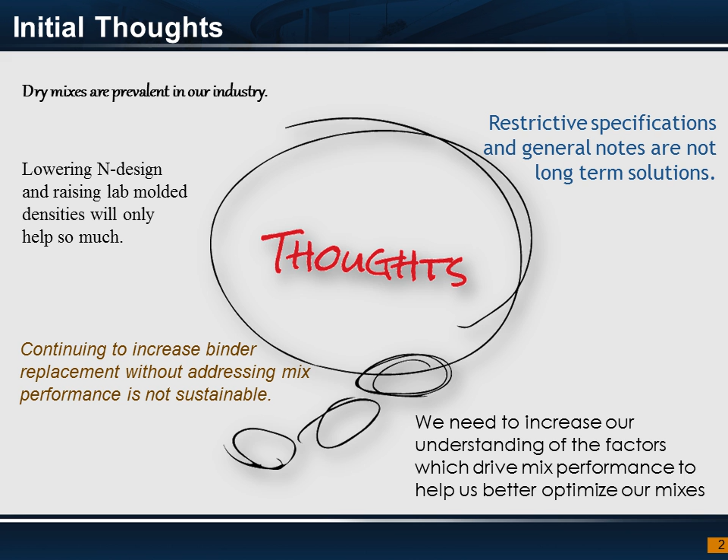What we really needed to do was increase our understanding of the factors that drive mix performance, so that can help us better optimize our mixes.

This is a national problem. We've seen this, and I've talked to a lot of folks around the country when we were trying to get started and trying to pick their brain and see what they were doing.

There's a lot of studies out there, including the NCAT track. Texas Transportation Institute, TTI at Texas A&M University, has done a lot of work. There's a lot of things NAPA are working on, and also NCHRP's got a panel now, and they're actually looking at this balanced mixed design approach, or optimized mixed design.

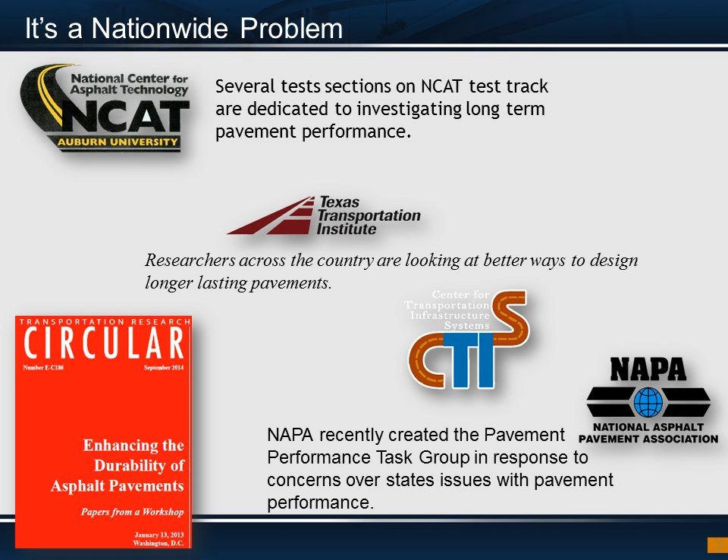You'll hear a lot of words: balanced, optimized, engineered, but it's basically kind of the same thing. As we get into it, I will get into the details, but you'll hear different terminology, though it's basically all the same thing.

One of the things we wanted to do was ask ourselves some questions when we went into this. And if you know a little bit about Texas, we're probably one of the last states that hasn't fully implemented over to Super Pave.

And I knew going into Super Pave that would probably get us a little more asphalt in our mix, and get us a little more durability.

But is Super Pave the answer? Looking across the country and seeing that a majority of people are still having some of the same issues we're having, probably not the ultimate answer. It's a step in the right direction for us. We're slowly getting there, but it's not the ultimate answer.

Is getting rid of RAP and RAS, recycled materials, really the answer? We've cut back on that a lot to try to address some of the durability problems, but it's really not been the answer, and from a sustainability standpoint, it's definitely not the answer. We'd like to be able to use those materials.

We just need to use them correctly. We throw around this term, use them but don't abuse them, and that's kind of where we got ourselves into a situation a few years ago where we were being abused with the recycled materials. I think we're using too much and not enough virgin binder in some of our mixes.

So is disallowing modifiers like REOB and PPA the answer? We definitely have limits on those, but we don't eliminate them. We don't disallow them because I know they've been used in binders for a long time. It's really trying to find binders that are compatible with whatever you're adding to them, whether that's any kind of additives or modifiers. So we knew we've got to be able to control those amounts, but we don't necessarily need to eliminate them. And really, the obvious question is doing things the same way we've always done them the answer, and that's evidently no.

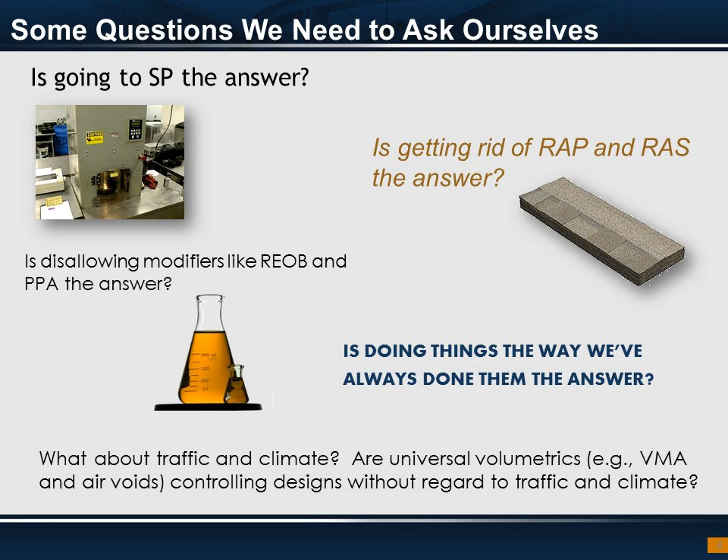So really it comes down to we've got to stop using the recipe to determine if the cake is good. Define our expectations and open up the recipe to meet the end result. In other words, I think about cake - what defines a good cake? If it tastes good, what defines a good mix? Is it got lasting performance? Is the traveling public getting what they paid for and enjoying the ride and the quality of the product?

It really depends. If you look at the top picture, if I go to a 5-star restaurant, that's how I define good. If I'm going camping, the bottom picture with the Little Debbie's, that's how I define good. So it depends on what roadway you're going to put that on. So the idea is use what works, eliminate what doesn't, be simple and practical.

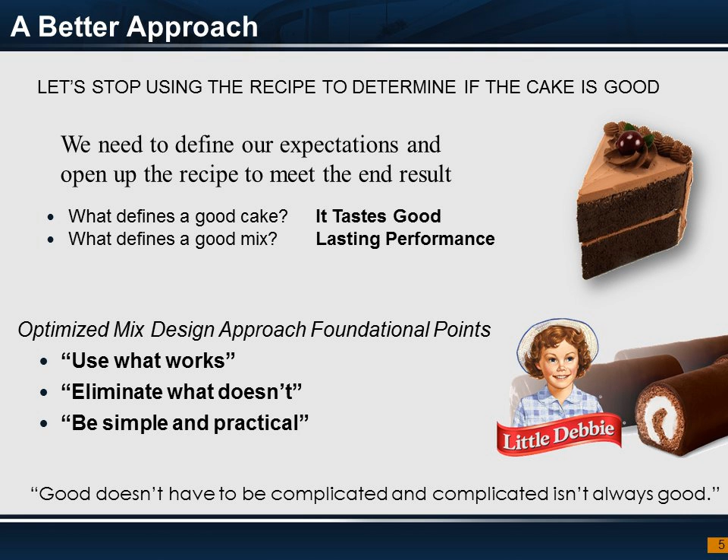We started talking to a lot of our contracting community about this, and really it came down to this: what we need from a design mixture and what the contractors want. Really what we needed was to start designing for performance, for quality, instead of economics. And what the contractors wanted was a level playing field. So we're trying to figure out how we can do both of those things and still get a quality product out there.

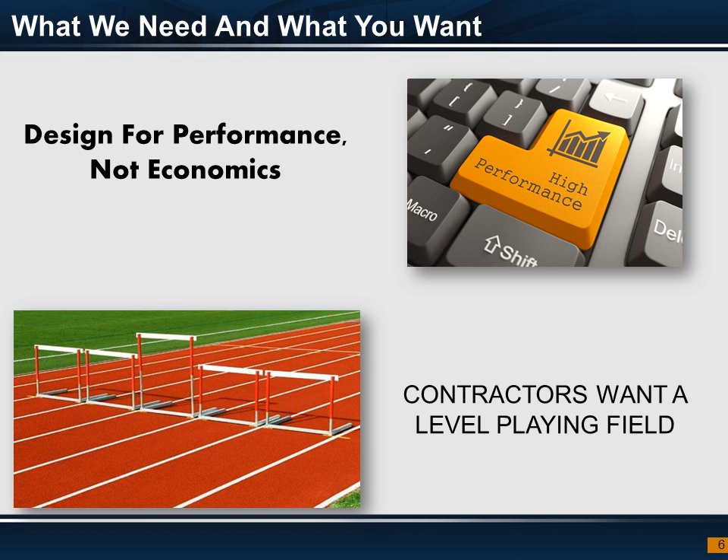So when we looked at this balanced mix design approach, we were just trying to define what that really meant. So we just kind of defined it as a way to optimize the mix to provide needed performance between stability and durability. I'll talk a little bit more about that, and we'll get into the details of this now.

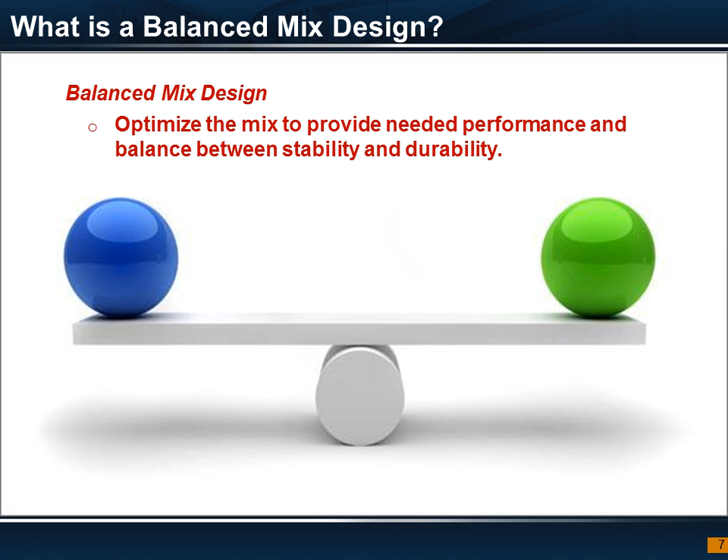So when we look at mix performance evaluation, this is really the key part of what we're calling the optimized mix design or balanced mix design. And that's between stability, or resistance to rutting as some people call it, and durability, which is some form of cracking resistance. Depending on where you are, there's a lot of different tests you can use to provide an idea of rutting resistance and cracking resistance, and you really define that based on what's going to work in your area. I'm not saying we have our own approach, and I know there are some other approaches out there that other states use certain tests for. But for us, it's finding a balance between both of those.

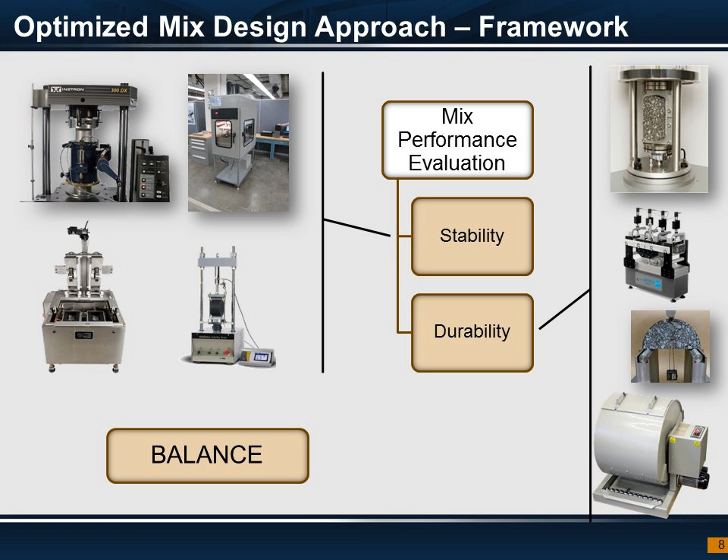In our approach to optimize mix design, it's really for stability we're looking at the Hamburg wheel tracking device. We've used that for years. We have a lot of data with that.

For durability, we're looking at the overlay test. We've done a lot of work, and there were some issues around the variability of that test. I'm going to show you a little bit of work done by the University of Texas, El Paso, to try to resolve some of those variability issues. I'll spend a minute talking about that a few slides from now.

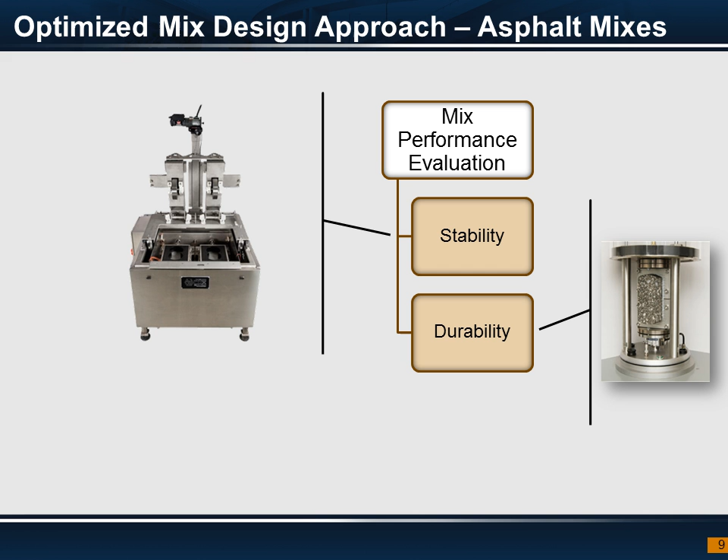The idea was we really couldn't do balanced mix design or optimized mix design without having both bookends. We felt really comfortable with the Hamburg, but for the longest time we had issues with the variability in the overlay test. So until we got that resolved, we were a little bit hesitant about moving forward with this approach.

This was some work we had done several years ago, just starting to get the idea of how the mixtures behaved. This is asphalt content, and you're plotting this where the left side is the Hamburg rut depth, and the right axis is the overlay. So as you can see from the graph, when you add more asphalt, your Hamburgs get worse and your overlays get better.

Just so you have an idea, the overlay test is sensitive to binder quality, but it's a lot more sensitive to the quantity of binder. In other words, softer binders from a PG 28 are always going to perform a little better than a PG 22 binder on the bottom end. But what really drives it is that asphalt content. The more asphalt we get in that mix, the better the overlay number gets, as you can see here.

The balance here is not where these things cross, because they're obviously on two different axes, but it's that point where you set the thresholds. In this case, we've got 10,000 passes on the Hamburg, 300 cycles on the overlay, so that optimum, or that range, is going to be between 5.3 and 5.7 on AC content.

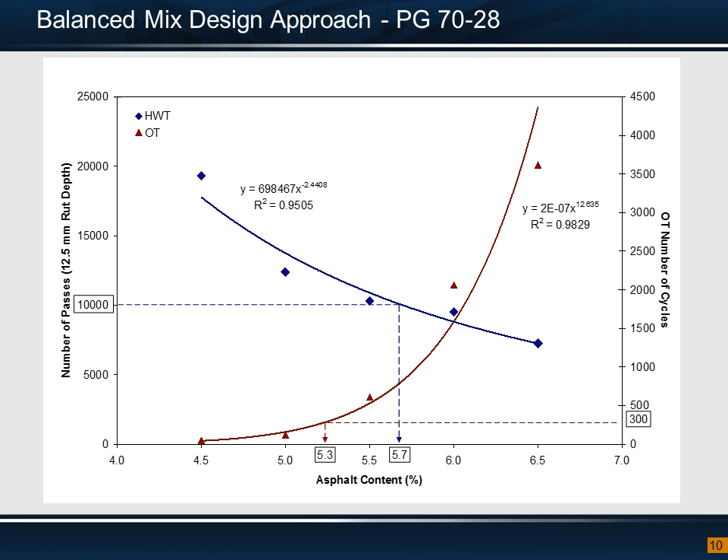This is another example of some of the stuff we're already kind of doing in Texas. We've got a particular mix called limestone rock asphalt, and it naturally occurs. There's a couple of huge quarries in South Texas, and there's actually asphalt inside the rock. They use a flux and bring it out, and we use it a lot for patching and repair work.

So we were having some issues with durability, and we have a Hveem stabilometer to test for stability. Everything was meeting stability, but we were having issues with raveling and oxidation of this mix. So we started to do the Cantabro test, which is kind of the balance between those two.

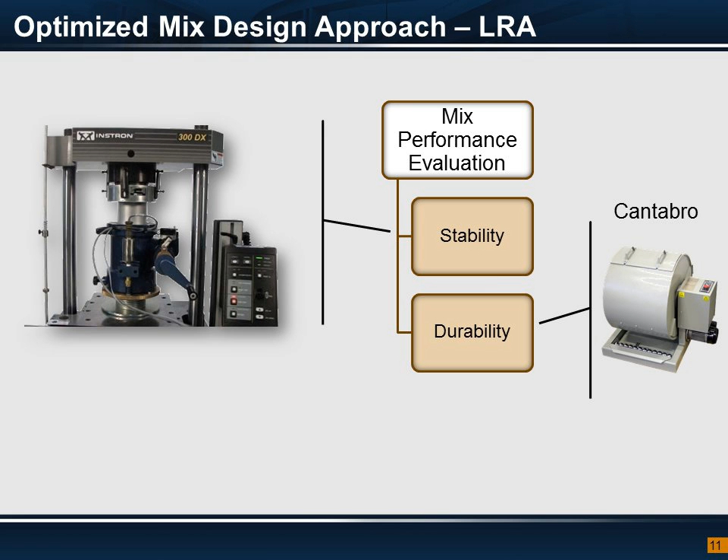This is an example of the data from one of the types of mixes from that LRA. It's just a different way to look at this, but still the same kind of approach, balancing between stability and durability. And where we set that threshold on the Cantabro loss is really defined by trying to eliminate certain material.

We're just basically trying to eliminate this material up here. So this was some of the mixes that were giving us problems for this LRA. You kind of get an idea that's another way to make this balanced mix design approach work.

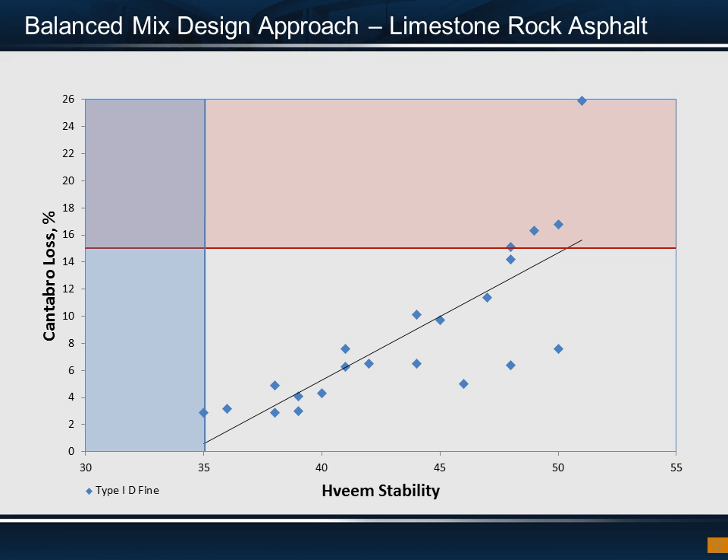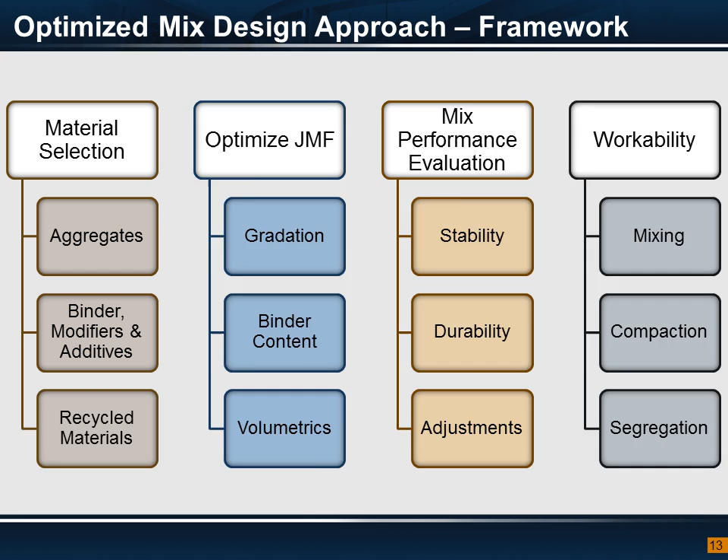We've always got to have a concern on what aggregates we use, and we have an aggregate classification system which we call SAC, which determines what we're going to use for frictional properties. We can't get away from that. We're going to have to make sure we've got good frictional properties on whatever aggregate we use for our mixes. So that's going to have to be addressed.

For binders, modifiers, and additives, let me step back for a sec. When we started seeing issues with some of our binders, we noticed it was some things going on with the recycled engine oil bottoms, or PPA, we were starting to see these things pop up in some of the binders. We realized when we went back to address those, that they were all meeting PG specification.

And so it wasn't really addressing the quality of the binder. There's some research now going on within Texas where we're actually asking, what's a good test that will actually give us a kind of qualitative measure of the binder? In other words, we need to make sure that even if it meets a PG spec, it's going to be a good quality binder for long-term performance.

One of the things we've really looked at is this delta T sub C, the critical temperature on our BBR. I've got a slide on that in just a second to explain that a little bit, and some of you may already be aware of that. And then, of course, there's been a lot of work on MSCR, and we're really looking at MSCR as well to indicate that, as well as some other tests. But something's got to be there that helps us define the quality of the binder itself when we use it in a mix design.

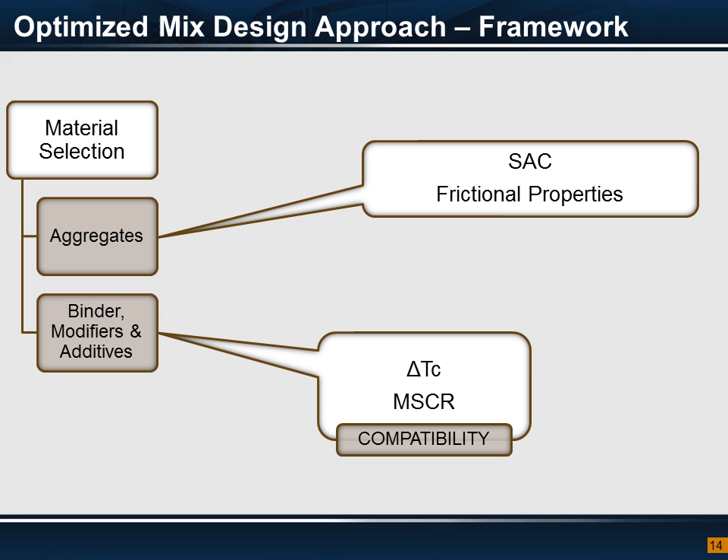This is a little bit of the explanation on the delta T sub C. When you run the BBR, the bending beam rheometer, you're getting two values: a stiffness value, which we call S, and a slope, which we call M. You can obtain a base temperature for S and M, and whichever temperature is higher is the one that controls. But what we started to see was when we saw big differences between the S value and the M value, kind of defined as greater than 6 degrees.

I've seen some work out there saying 5 degrees. But regardless, when you start to see a big difference in temperature, we started to see issues with the quality of the binder. So that's one of the things we're really focusing on here as well. It's just a piece that goes into the puzzle of this whole framework.

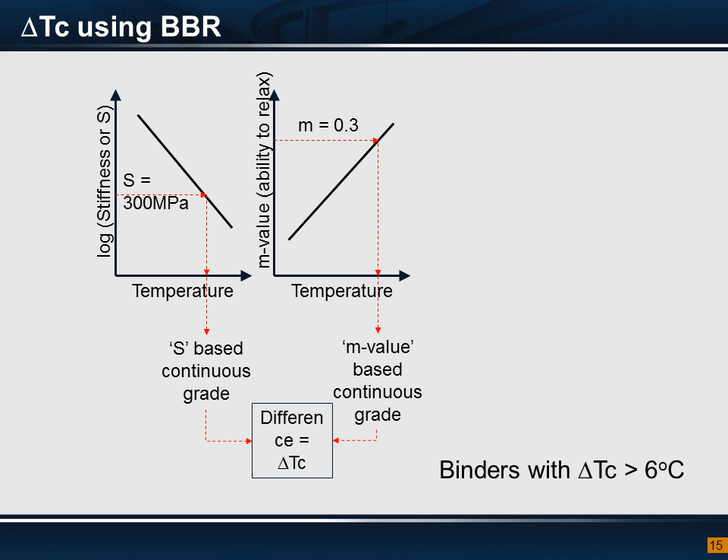As far as optimizing the mix design, as far as volumetrics, we really have to have some kind of way to make sure we're optimizing our gradations. When we moved to Superpave, there were a lot of contractors out there who design their own mixes, and they were used to putting the mix gradation through a really small gradation band. So now when you go to Superpave, it's wide open, and they're really struggling on how to optimize this gradation. So there are some methods out there - I'm not saying this is the only one.

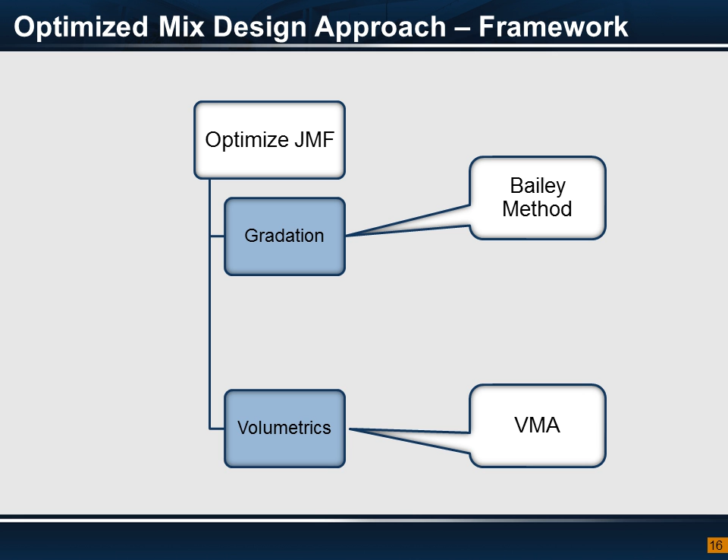I just have this that we need to somehow make sure we're optimizing our gradations as well, and then of course give us the right volumetrics. And what does that look like? VMA, air voids, there's a lot of things out there. I like VMA, but we've got to make sure we're getting the right properties to make sure we're getting a good JMF and good volumetrics.

And then of course we've talked about this as well with the mix performance between stability using the Hamburg and durability using the overlay test.

And the more we got into this and started applying it to a few jobs, like I said, we're still in the research phase and actually doing some test projects. But we thought about it this way: if you've got a mix design, a lot of contractors, at least in Texas, are pretty stationary. They have the aggregates they normally use, so it's a set of given materials they're constantly going to make all their mixes with. So if you kind of know what materials you're going to have, then you've got a handful of mixes that you're going to produce every year.

So we thought this is an opportunity where if you've got a certain mix design, it's almost like going to the doctor. If you're going to go to the doctor and say, doctor, I'm thinking about running marathons, or taking up swimming, or whatever the sport is, well the doctor's going to give you a checkup and say, are you ready for that or not. So that was kind of the idea.

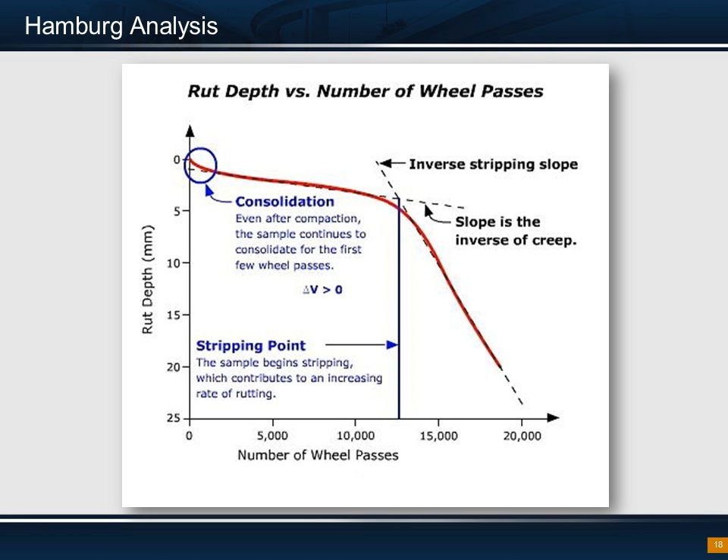You could take a mix design, send it in, and we do this kind of checkup on a mix. We go through the Hamburg analysis where we can plot out the number of passes versus the rut depth, and you can get an indication if there's a case for stripping. So every time we run Hamburgs, we say, okay, did it rut, did it rut and strip, or did it just strip? So there's an indication there that'll tell you what's going on with it.

Robert, yes, I'm not quite sure who's speaking. Can you guys please be sure to mute your phones for just a second? We're hearing a lot of background noise, and I don't think that's on my end or Robert's end. Not on my end. All right, somebody's having a party. Yeah, I still hear it, and I'm not quite sure who it is.

Well, I'm going to try to plow through if that's all right. Go for it, Robert. All right.

We had this initial setup where we started to run into a lot of variability issues with the overlay test. We were taking this 93% reduction of the initial load, and the number of cycles it took to get there, that's where we ended the test. So you end up with a number of cycles.

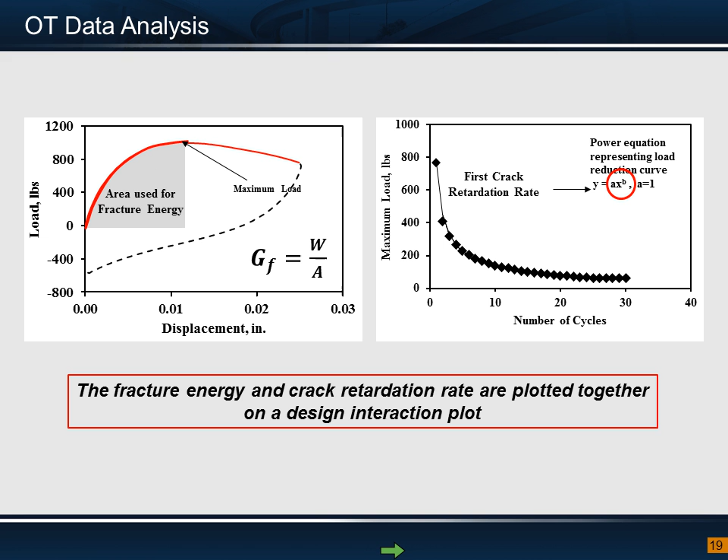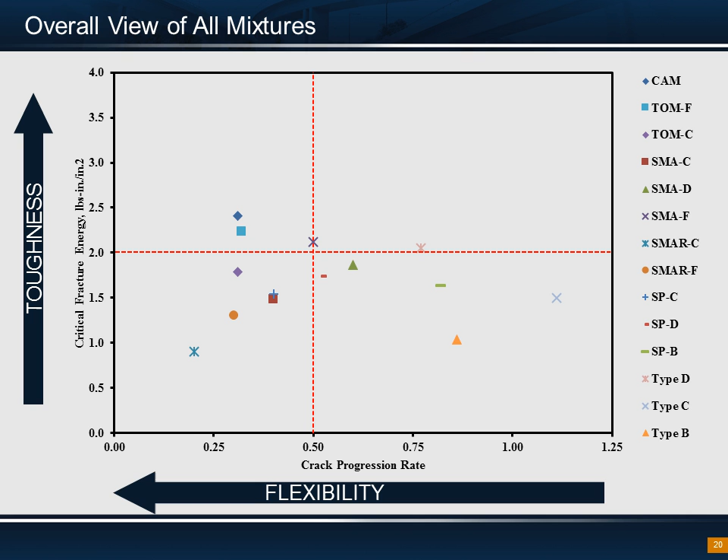So now the idea is, not that these mixes are good or bad, but what mixes can be used for what types of roadways or solutions when we put pavement structures together. Also, the idea was, okay, I'm in this area with the Superpave D. How do I move this mix from here to here? What do I need to do to get it from this quadrant to this quadrant? This is some of the work that's still ongoing, but the idea is how do we get these mixes to be more tough to crack and more slow to crack. That's the idea behind the new overlay work done at the University of Texas El Paso, and there's a lot of that work coming out as well.

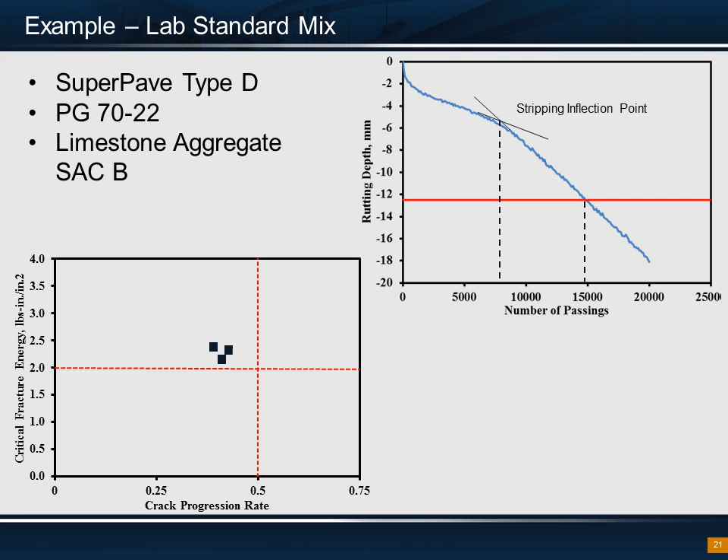So the constraints for us, when we talk about this with the contracting community, one of the things we said is we'd like to get away from all the detailed specifications, really telling the contractor exactly what we want and how we want it, and all these parameters we're trying to define, so it gets really restrictive.

So the idea is to take all that away and really look at performance tests like the Hamburg and the overlay, with some form of volumetric that would have to be in there. And of course you've got aggregate and binder, some kind of quality properties that indicate you've got good materials going in.

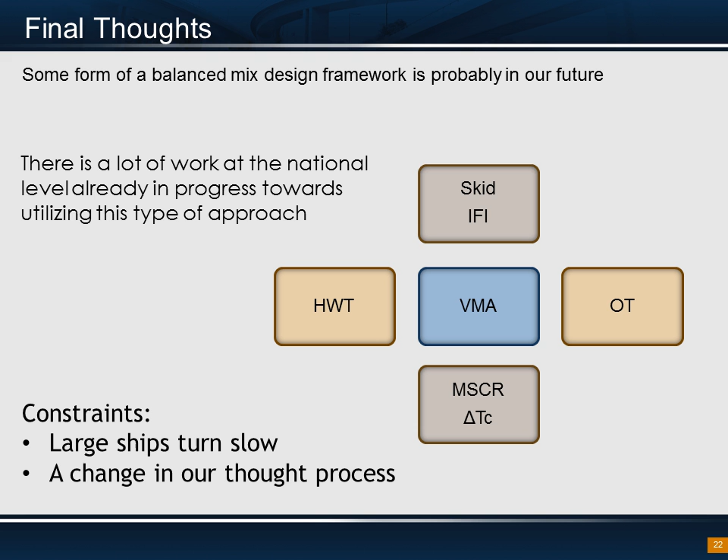So we know that's a slow process for us. I mean, we're a DOT, and I'm not going to pretend we don't have our own bureaucracy, but it takes a little while to get that done. We've got to change our thought process, how we look at the balanced mix design approach, and give that control over to where, okay contractor, I don't care about all the other things, I just want something that's going to perform. And with that, that's all I have.

I guess we will open it up to questions.